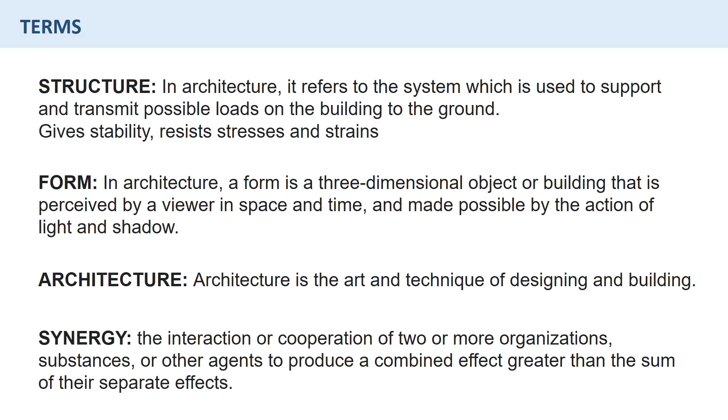The syllabus for week 5 is framed structures, arch structures, vault structures, dome structures and grid structures. Details will be discussed about each of these, from the structure point of view, along with typologies, and also different instances from history.

Starting with the session now. Question number 1: A wedge-shaped or tapered stone used to construct an arch is called crown, voussoir, keystone or extrados.

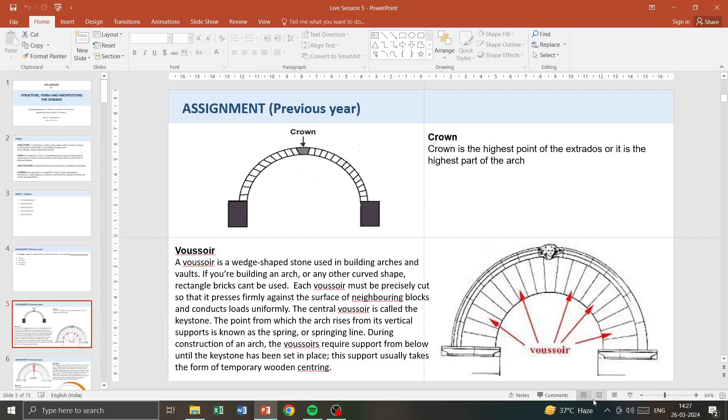Crown is considered to be the highest point of the extrados, or it is the highest part of the arch. In any arch, there are two parts: the inner circumference is called the intrados, and the outer circumference is called the extrados. So the crown is the highest point of the extrados, or the highest point of the arch.

What is a voussoir? A voussoir is a wedge-shaped stone used in building arches and vaults. If you are building an arch or any other curved shape, rectangular bricks cannot be used; they have to be wedges. Each voussoir should be precisely cut so that it presses firmly against the surface of the neighboring blocks and transfers the loads uniformly. The central voussoir is called the keystone.

So the voussoir at the crown or at the center is called a keystone, and the point from which the arch rises from its vertical supports is known as the spring or springing line. During construction of an arch, the voussoirs require support from below until the keystone has been set in place. This support usually takes the form of temporary wooden centering.

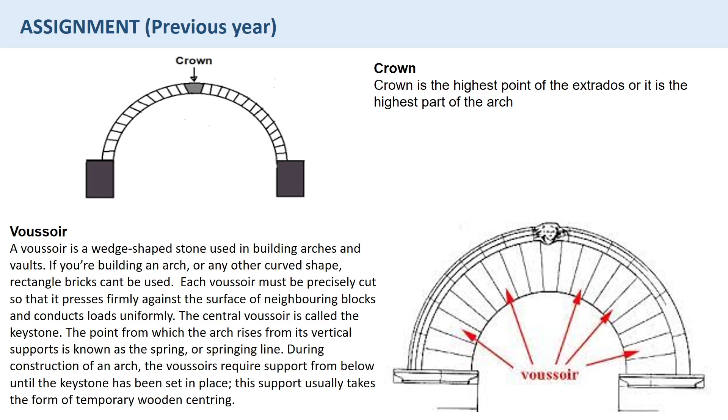So as you can see in the image, all the wedge-shaped stones or bricks that are used in building the arches are called voussoirs. What is keystone?

As mentioned in the previous slide, the wedge-shaped unit which is fixed at the crown of the arch is called a keystone. Now what is a crown? Crown is the topmost point of the extrados.

A keystone is also called a capstone, the wedge-shaped stone at the apex of the masonry arch, or typically a round-shaped one at the apex of a vault. In both cases, it is the final piece placed during construction, and it locks all the stones into position, allowing the arch or vault to bear weight.

In arches and vaults, such as quasi-domes, keystones are often enlarged beyond the structural requirements and decorated.

What is extrados? Extrados is the outer surface of an arch, or the outer curve of the arch ring. And the opposite of extrados is intrados, which is the inner surface of an arch, or the inner curve of the arch ring. So extrados is the outer curve of the arch ring.

The highest point in the extrados is called a crown. The different wedge-shaped stones or bricks that are used to make the arch are called voussoirs, and the voussoir at the center or at the crown is called a keystone.

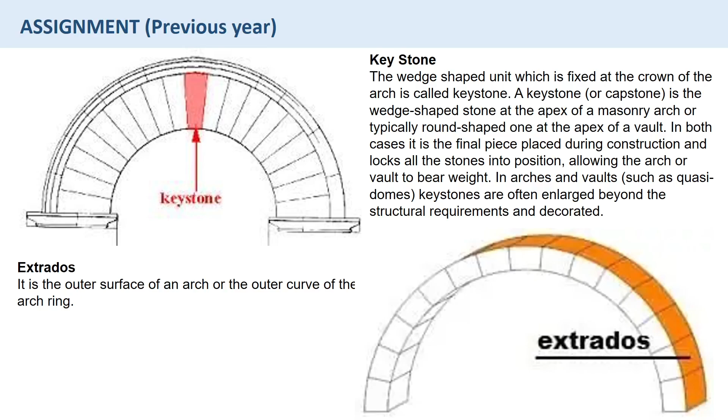The keystone is fit in last, and it is the final piece that is placed during construction, and it locks all the stones into position. Keystones are often enlarged beyond the structural requirements, and they are often decorated also.

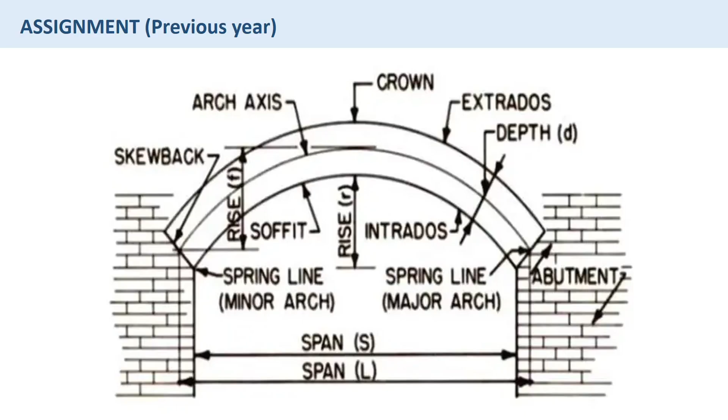So this image shows the different parts of the arch. We have the crown here, we have intrados and extrados, the depth of arch, the spring line, the span and the abutment. All these points are shown in this image, and you can see, and also the rise.

So the answer is voussoir. The wedge-shaped or tapered stone which is used to construct an arch is called voussoir.

Question number 2. Columns and beams are made monolithically and act together to tolerate the moments created due to imposed load on structure. Options: pneumatic structure, folded plate structure, rigid frame structure, or braced frame structure. So the question is asking which type of structure has columns and beams made monolithically and acting together to tolerate the moments created due to imposed load on the structure.

Starting with the first term, pneumatic structure. What is a pneumatic structure? A pneumatic structure is a membrane structure, and it is stabilized by the pressure of compressed air. Pneumatic structures are characterized by a slightly higher pressure of internal air above the outside pressure. These structures are supported by pressurized air within the inflated building elements, which are shaped to carry loads in a traditional manner. The roof membrane of the pneumatic structure is made from rubber or reinforced films using industrial fabrics coated with polymers. For example, one of the fabrics used is called ETFE.

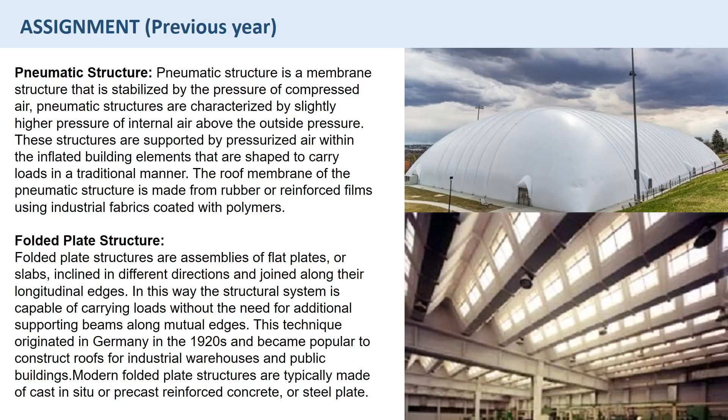Rigid frame structure: a rigid frame system consists of linear elements like beams and columns. The word rigid means ability to resist deformation. It is used in steel and reinforced concrete buildings. Rigid frames are characterized by the lack of pin joints within the frame and are typically statically indeterminate. A rigid frame is capable of resisting both vertical and lateral loads by bending of beams and columns. Stiffness of the rigid frame is provided mainly by the bending rigidity of beams and columns that have rigid connections.

So rigid frame structures consist of linear elements, basically beams and columns. Rigid means the ability to resist deformation. Rigid frame structure is used in steel and reinforced concrete buildings, and they are characterized by the lack of pin joints within the frame because the joints are usually rigid joints, and typically statically indeterminate. It is capable of resisting both vertical and lateral loads.

What are braced frame structures? Braced frames are composed of beams and columns that are pin connected with bracing to resist lateral loads. This type of frame is simple to analyze and simple to construct. The resistance to lateral forces is obtained through both horizontal and vertical bracing. Many types of bracing can be used, for example knee bracing, diagonal bracing, X bracing.

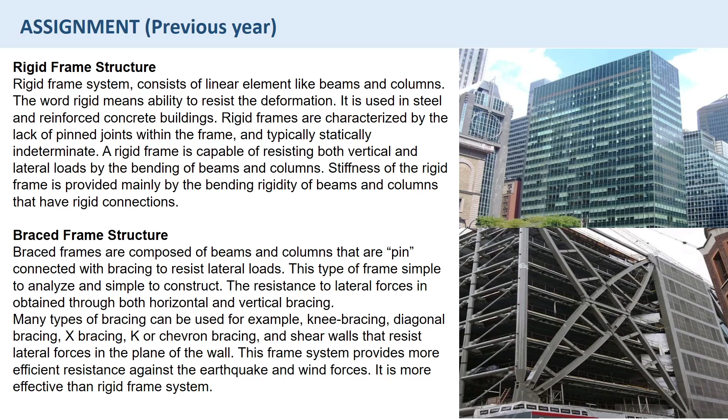So basically, braced frame systems are composed of columns and beams that are pin connected with bracing, and these braces are usually connected to provide extra resistance to lateral forces, which is very efficient against earthquake and wind forces. So the answer is rigid frame structure. In rigid frame structures, columns and beams are made monolithically and act together to tolerate the moments created due to imposed load on the structure.

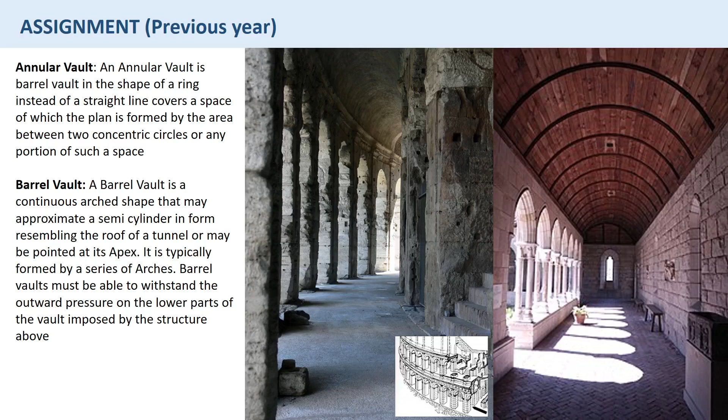Catalan vault: a Catalan vault is a type of low brickwork arch formed by a vaulted ceiling that often supports a floor above. It is constructed by layering a first layer of light bricks lengthwise in space, without centering or formwork, and it has a much gentler curve.

Fan vault: a fan vault is formed by a series of concave sections or ribs that spread out from a series of spring points. The ribs of a fan vault are of equal curvature and rotated at equal distances around a central vertical axis. It is mostly used in Gothic architecture.

So the answer is barrel vault. A barrel vault is a continuous arched shape that may approximate a semi cylinder in form.

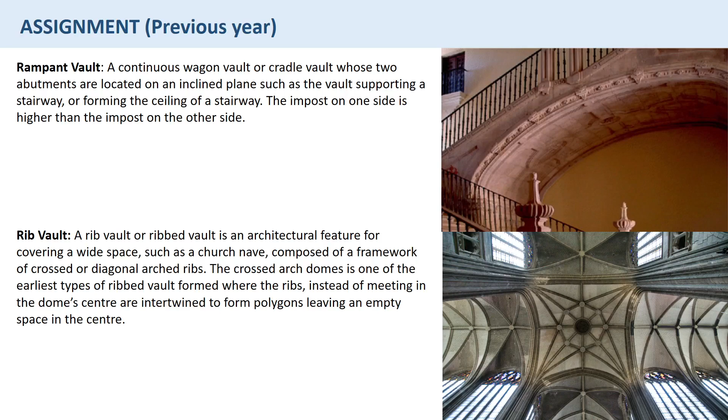A ribbed vault is an architectural feature for covering a wide space such as a church nave, composed of a framework of crossed or diagonal arched ribs. The crossed arch dome is one of the earliest types of ribbed vault, formed where the ribs, instead of meeting in the dome's center, are intertwined to form polygons, leaving an empty space in the center. So the answer is rib vault.

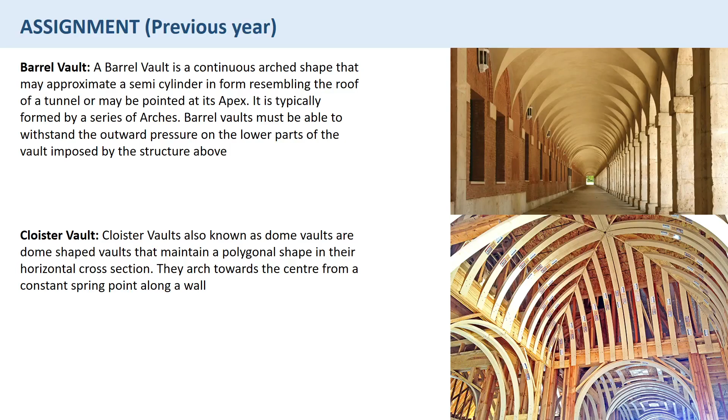I will check this answer once. I have a doubt about this answer.

Next, question number 6.

This is any building with a circular ground plan covered by a dome.

So yes, the correct answer to question number 5 is rib vault only, and four innovative ribbed vaults were built in the extension of the Mosque of Cordoba. The pattern of crossed arch vaults, together with the early and systematic use of ovals for the ribs, makes them a unique case of research. So the answer is rib vault. They have innovative rib vaults, crossed arch vaults, and innovative rib vaults in that.

So this is any building with a circular ground plan covered by a dome. Options: A coffer, B rotunda, C squinch, D pendentive.

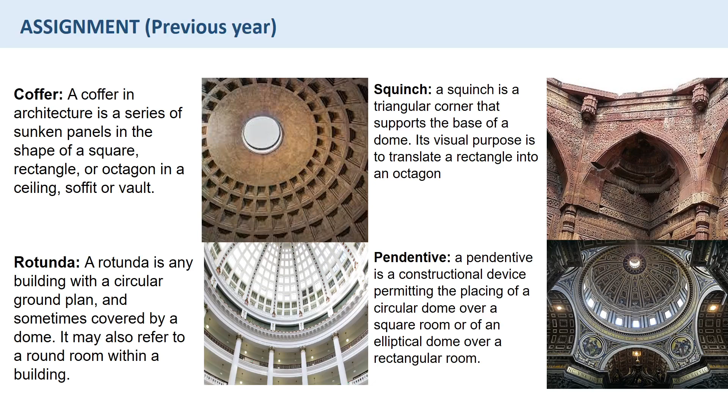However, a pendentive is a constructional device which permits the placing of a circular dome over a square room, or an elliptical dome over a rectangular room. So in a squinch, there is already a square room, and squinches are added to support the dome, creating an octagon. But in a pendentive, there is supposed to be a square room, but the upper part of the columns is curved and constructed in such a way that it supports the dome.

So the answer is rotunda. A rotunda is any building with a circular ground plan covered by a dome. This is an example of a rotunda with coffer slabs, and it also has an oculus in the center. This is from the Pantheon, Rome.

Question number 7. The Metropol Parasol in Italy is an appropriate example of: grid structure, arch structure, cable suspended tensile structure, or pneumatic structure. This is what the Metropol Parasol looks like.

What is a grid structure? A grid is a structure, usually two-dimensional, made up of a series of intersecting straight, vertical, horizontal, angular, or curved lines. It provides more structural stability without using a lot of additional material. Arch structures: in architecture, an arch is an opening in a structure that is curved on top and designed to distribute weight.

Arches are self-supporting compressive structures, stabilized by the force of gravity acting on their weight, which makes them very stable and efficient, capable of larger spans and supporting greater loads than horizontal beams.

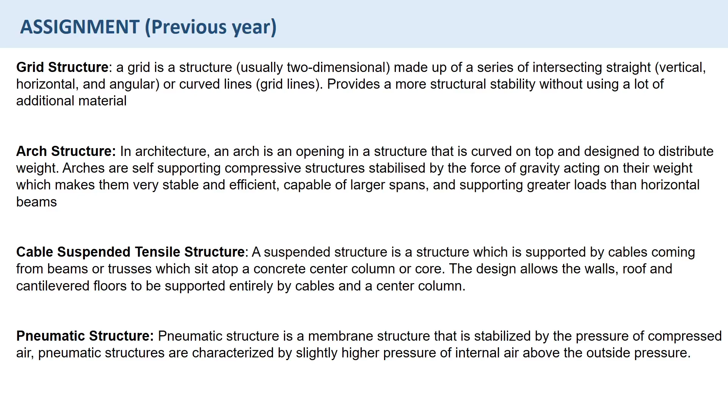Pneumatic structure is a membrane structure which is stabilized by the pressure of compressed air. Pneumatic structures are characterized by slightly higher pressure of internal air above the outside pressure.

The answer is A, Grid structure. Metropol Parasol in Italy is an appropriate example of grid structure because, as you can see in these images, it is a curved grid structure, with intersecting parallel lines intersecting each other at right angles.

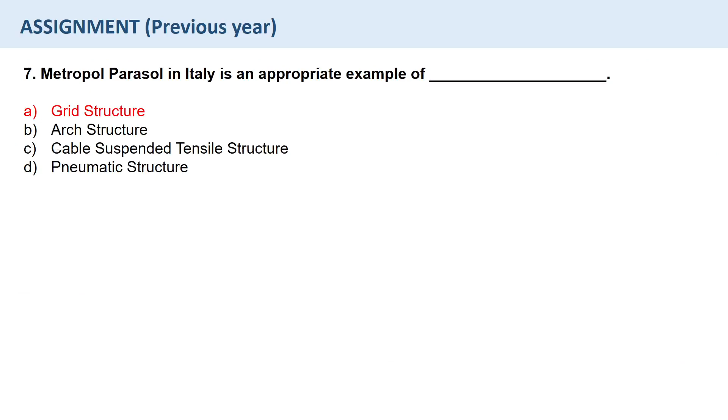Question number 8. A straight or arch structure across an interior angle of a square tower to carry a dome is called as: oculus, tholobate, squinch, or pendentive.

Oculus is a circular opening in the center of a dome or in a wall. It is originating in antiquity, and is a feature of Byzantine and neoclassical architecture.

A tholobate, or drum, is the upright part of a building on which a dome is raised. It is generally in the shape of a cylinder or a polygonal prism.

Squinch is a triangular corner that supports the base of a dome. Its visual purpose is to translate a rectangle into an octagon.

A pendentive is a constructional device permitting the placing of a circular dome over a square room, or of an elliptical dome over a rectangular room. So the answer is squinch: a straight or arch structure across an interior angle of a square tower to carry a dome is called squinch.

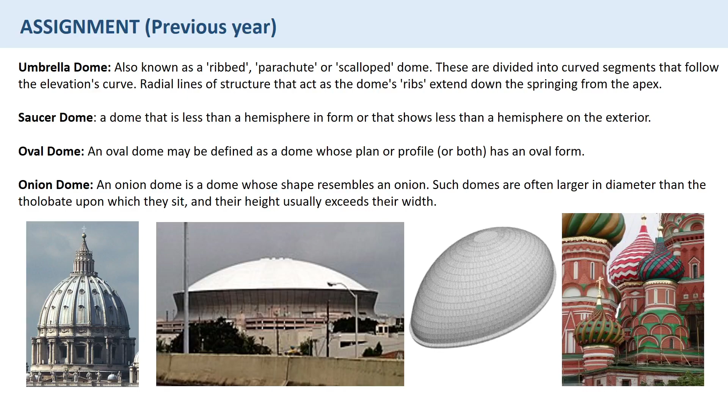Onion dome: a dome whose shape resembles an onion. Such domes are often larger in diameter than the tholobate upon which they sit, and their height usually exceeds their width. It is a common feature of Russian architecture.

So the answer is onion dome. The dome type used in the Saint Sophia Cathedral in Novgorod, Russia is onion dome. Going back to the image, you can see how these domes are onion shaped. So the answer is onion dome.

Question number 10. Which of the following buildings used a diagrid structure for its construction? Burj Al Arab, Swiss Re 30 St. Mary Axe (the Gherkin), Willis Tower Chicago, or Burj Khalifa.

So what is a diagrid structure? A diagrid, a portmanteau of 'diagonal grid,' is a framework of diagonally intersecting metal, concrete, or wooden beams used in the construction of buildings and roofs. It requires less structural steel than a conventional steel frame. Hearst Tower in New York, designed by Norman Foster, uses 21% less steel than the standard design.

The diagrid obviates the need for columns and can be used to make large column-free expanses of roofing.

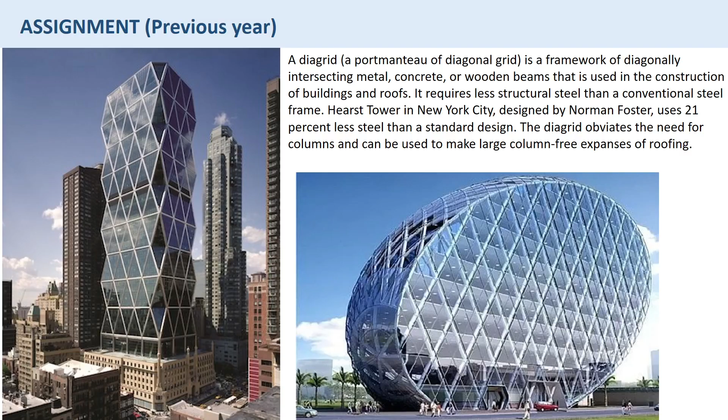Now for the four buildings mentioned in the question: Burj Al Arab, Swiss Re 30 St. Mary Axe (the Gherkin), Willis Tower Chicago, and Burj Khalifa. The answer is Swiss Re 30 St. Mary Axe, the Gherkin, because it uses a diagrid structure. The Burj Al Arab uses braced frames, while Willis Tower Chicago and Burj Khalifa both use bundled tube structures. The answer is Swiss Re 30 St. Mary Axe, which uses a diagrid structure for its construction—it's a curved diagrid structure, but a diagrid structure nonetheless.

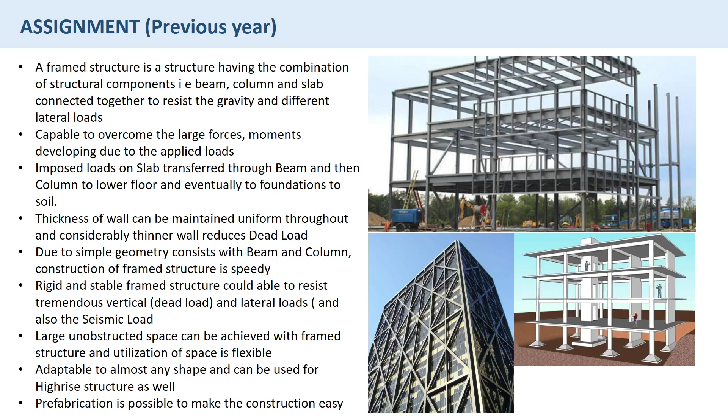Large unobstructed spaces can be achieved with frame structure, and utilization of space is flexible. It is adaptable to almost any shape and can be used for high-rise structure as well. Prefabrication is possible to make the construction easy.

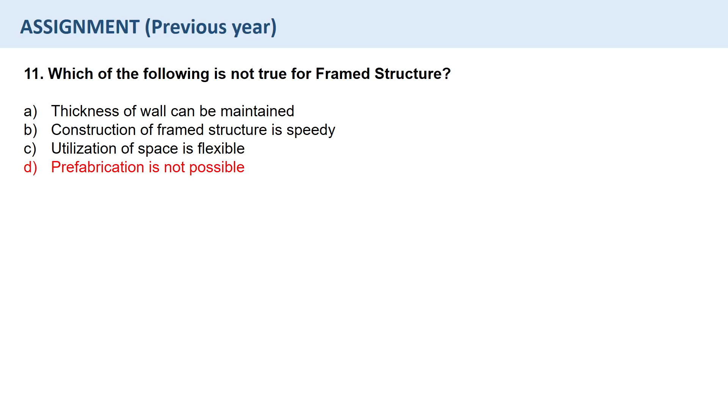So the answer is, the question was asking which of the following statement is not true. Since prefabrication is also possible in frame structures, the statement D is not true, which is prefabrication is not possible in frame structures.

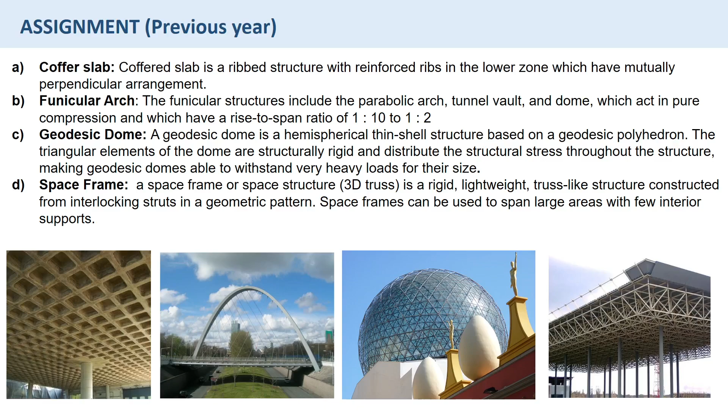So the answer is coffer slab. Coffer slab is an example of a grid structure.

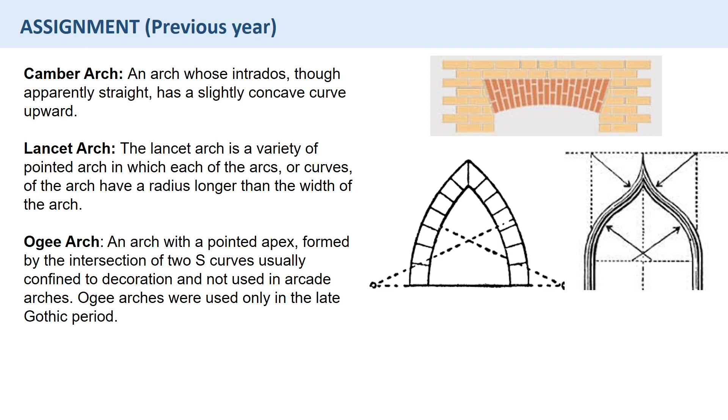And in ogee arch, there are two S curves which form this arch, and it is not used in arcade arches. It was usually used in Gothic period and Islamic architecture.

So the answer is focal. Focal is not a type of arch.

Question number 14. A continuous vault having two abutments located on an inclined plane is. So the answer is rampant vault.

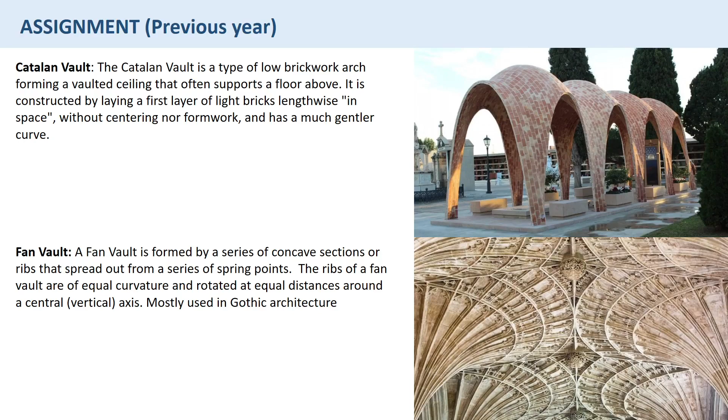In a rampant vault, a continuous wagon vault, it is also called a continuous wagon vault or a cradle vault, whose two abutments are located on an inclined plane, such as the vault supporting a stairway or forming the ceiling of a stairway. The impost on one side is higher than the impost on the other side.

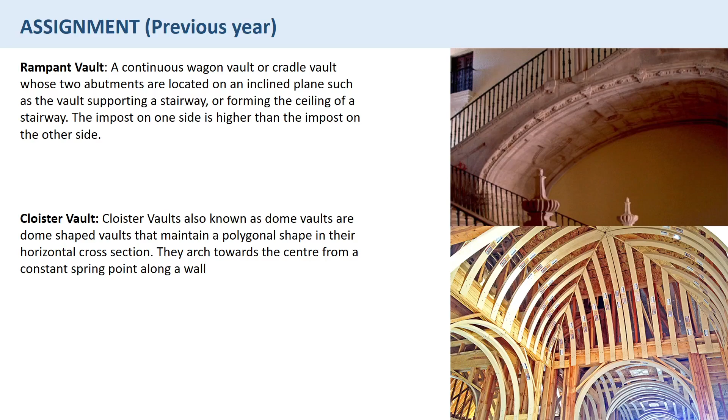So the answer is rampant vault. A continuous vault having two abutments located on an inclined plane is a rampant vault.

Question number 15. Meridional stress developed on a dome is dash in nature: compressive, tension, bending or shear. So the analysis of a shell or a dome is concerned with two types of stresses: the stresses that act on the meridional direction and the stresses that act in the parallel direction or hoop.

So the stresses that act on the meridians, which is the top of the dome to the bottom circumference of a dome, are compressive in nature. However, the stresses that occur on the hoops or the concentric circles are both compressive and tensile in nature.

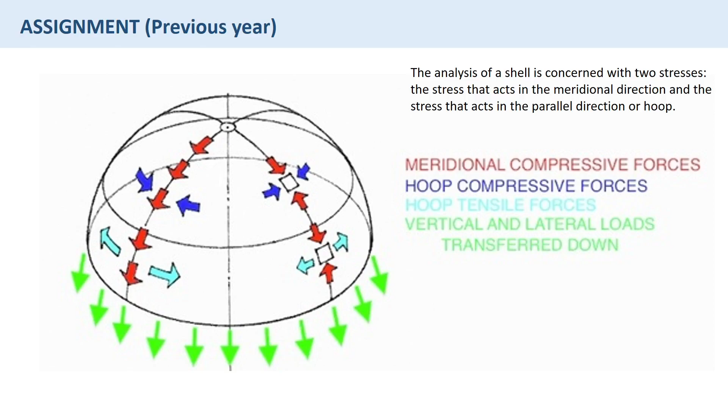So the meridional forces in a dome are compressive in nature, and the hoop stresses are both compressive and tensile in nature. So the answer is meridional stress developed on a dome is compression in nature. It has compression in nature, or it is compressive.

Question 16: The constructive device which allows the placement of a circular dome over a square room is called squinch, oculus, pendentive, or tholobate. As mentioned previously, an oculus is a circular opening in the center of a dome or wall. A tholobate, or drum, is the upright part of a building on which a dome is raised, generally shaped like a cylinder or polygonal prism.

A squinch is a triangular corner that supports the base of a dome, serving a visual purpose to translate the rectangle into an octagon. A pendentive is a constructional device which permits placing a circular dome over a square room, or an elliptical dome over a rectangular room. So the answer is C, pendentive - the device which allows placement of a circular dome over a square room.

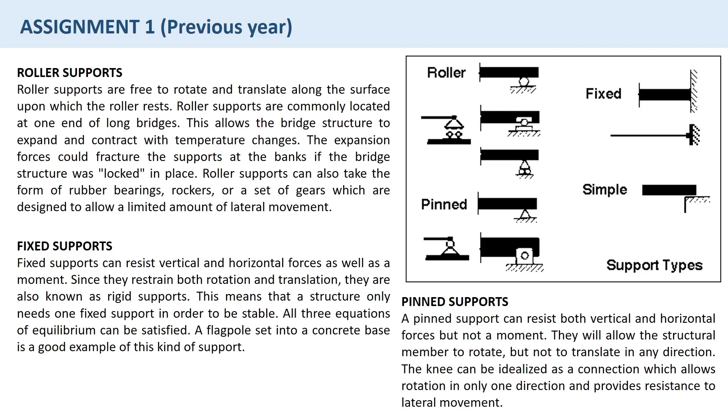A flagpole set into a concrete base is a good example of a fixed support. A pinned support can resist both vertical and horizontal forces but not a moment - they allow the structural member to rotate but not translate in any direction. The knee can be idealized as a connection allowing rotation in only one direction while providing resistance to lateral movement.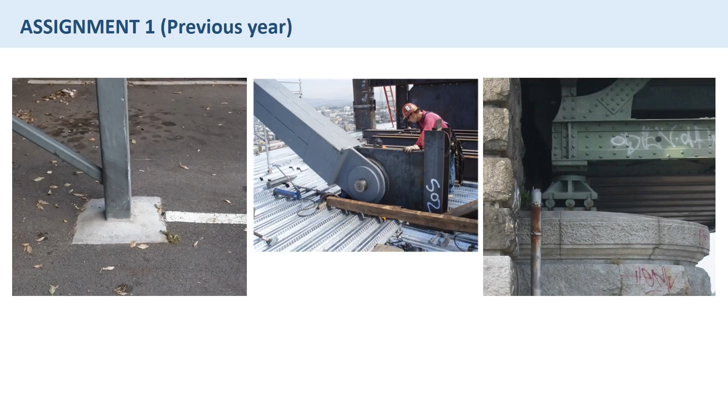So here are the examples: first is a fixed support of a pole and concrete, second is a pin support in which rotation is allowed but no translation, and third is a roller support in which both translation and rotation are allowed.

To summarize: fixed supports allow movement in no direction, restricting vertical, horizontal, and rotational movement. Pinned supports allow rotational movement about the supported location but restrict vertical and horizontal movement. Roller supports allow horizontal movement and rotation about the supported location, but restrict vertical movement.